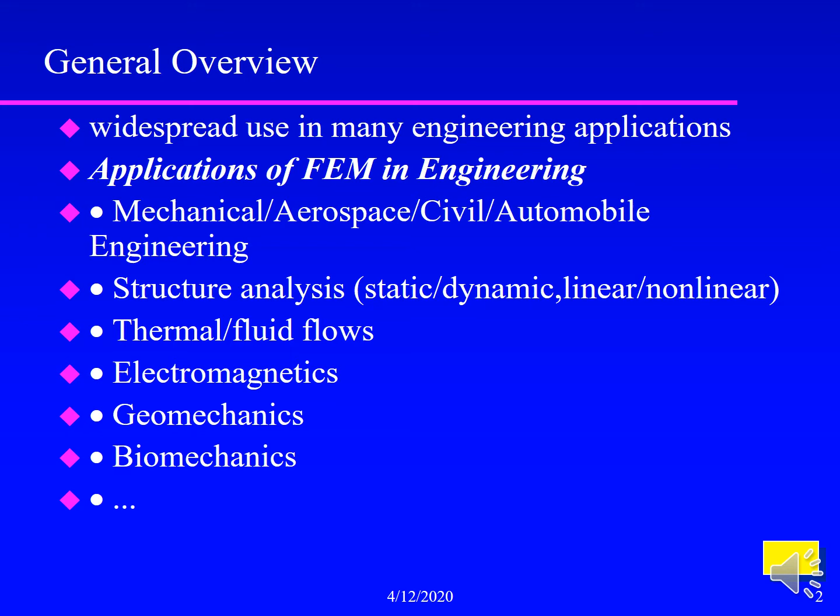Mechanical, aerospace, civil engineering, automobile engineering, anywhere it is applied. It is mainly used for structural analysis, static, dynamic, linear and nonlinear, thermal and fluid flows, electromagnetics, geomechanics, biomechanics. These are the examples which I discussed.

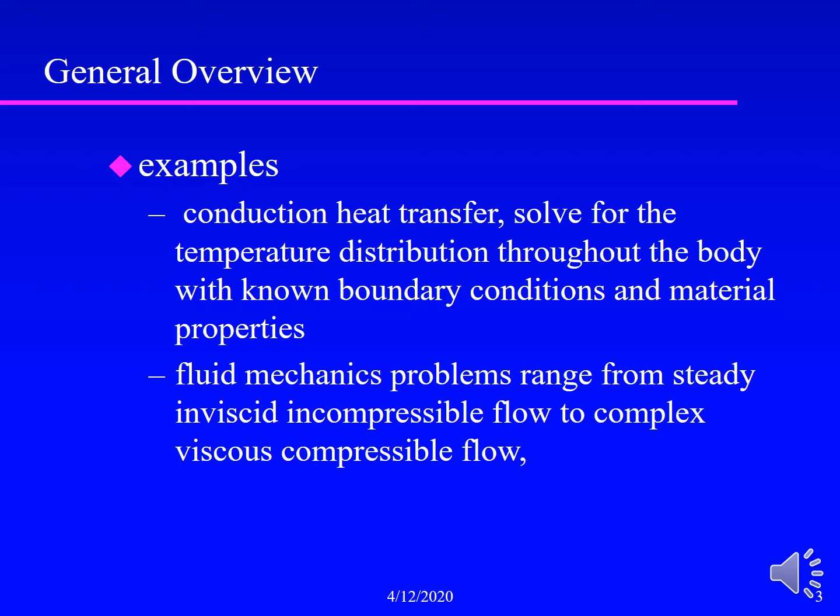A few examples are given: conduction heat transfer, the temperature distribution throughout the body with known boundary conditions and material properties. Fluid mechanics problems range from steady, incompressible flow to complex viscous compressible flow in various cases.

Acoustics uses finite element and boundary element numerical methods. Electromagnetic solutions for magnetic field strength give insight into the design of electromagnetic devices. Capabilities include fluid structure interactions, biomechanics, structural analysis, blood flow in blood vessels.

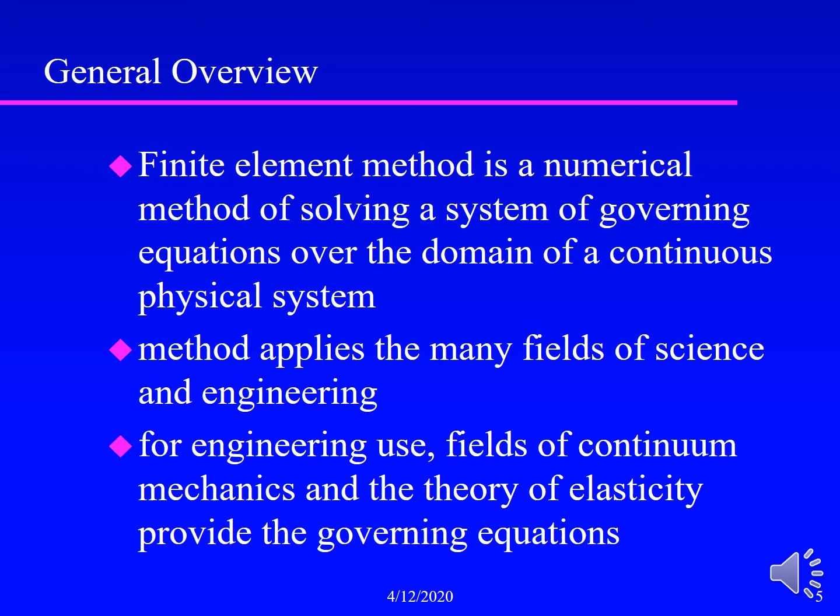The finite element method is a numerical method of solving a system of governing equations over the domain of a continuous physical system. The method applies in many fields of science and engineering. Continuum mechanics and the theory of elasticity provide the governing equations, which are solved by finite elements. A numerical method is used in order to make the solution easy.

Most engineering problems require the solution of governing differential equations. As in the case of a tapered bar, the displacement satisfies the equation du/dx plus P/(AE) equal to 0. This is the fixed end, where u(0) is equal to 0, and the unknown displacements at various points are found by the equations.

For the beam, the governing equation of deflection is d⁴w/dx⁴ plus p(x)/EI equal to 0. At x = 0, dw/dx is the slope, and both deflection and slope are 0 at the fixed end, and the unknown displacement w is solved by finite elements.

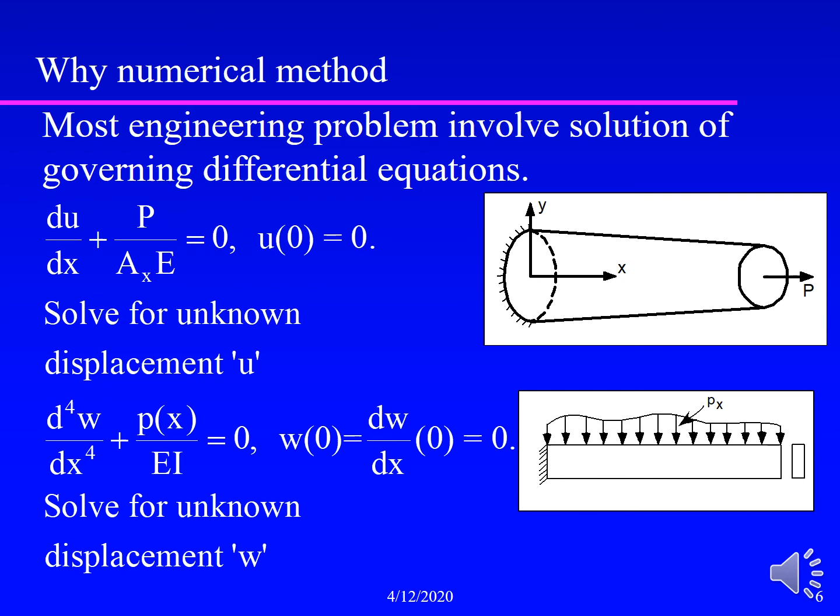Heat transfer, torsion of shafts, irrotational flow, seepage through porous media. These are the equations: ∂/∂x(kx ∂φ/∂x) plus ∂/∂y(ky ∂φ/∂y) plus ∂/∂z(kz ∂φ/∂z) plus Q equal to 0, where φ is the potential function. As boundary condition on a particular surface, known functions of φ are given, and the unknown function φ is to be solved inside the domain.

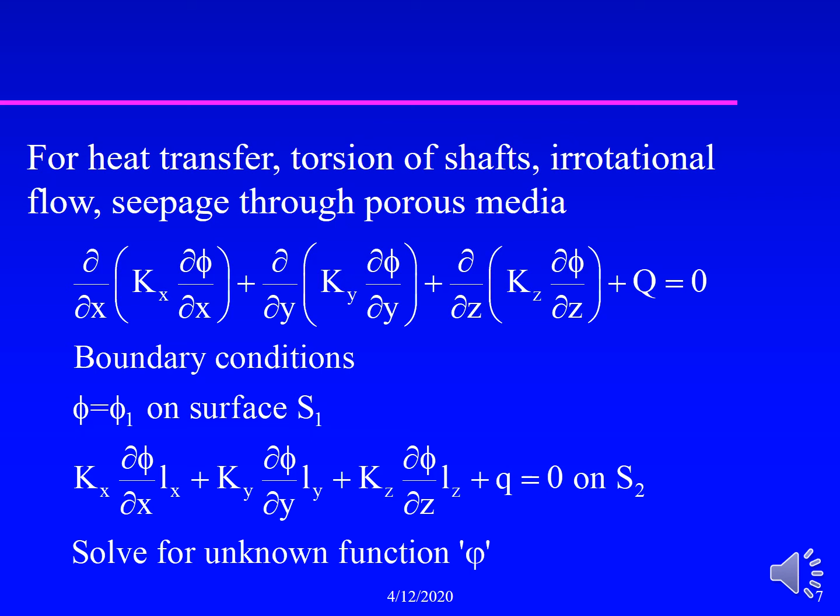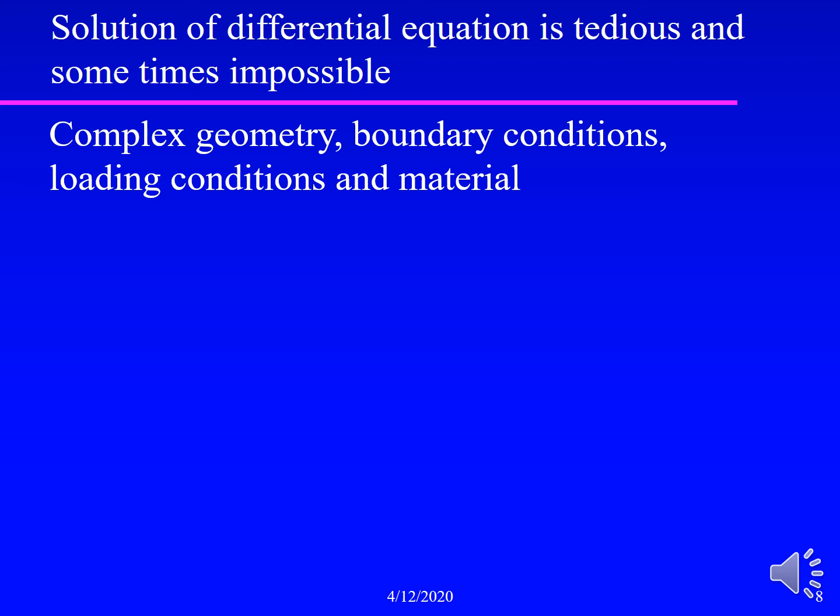The solution is tedious, sometimes impossible, therefore we go for finite elements, due to complex geometry, boundary conditions, loading conditions and material. When the geometry is complex, you cannot have the exact solution. Boundary conditions also vary. Loading conditions and materials differ at different positions, as you can observe in geomechanics and soil mechanics.

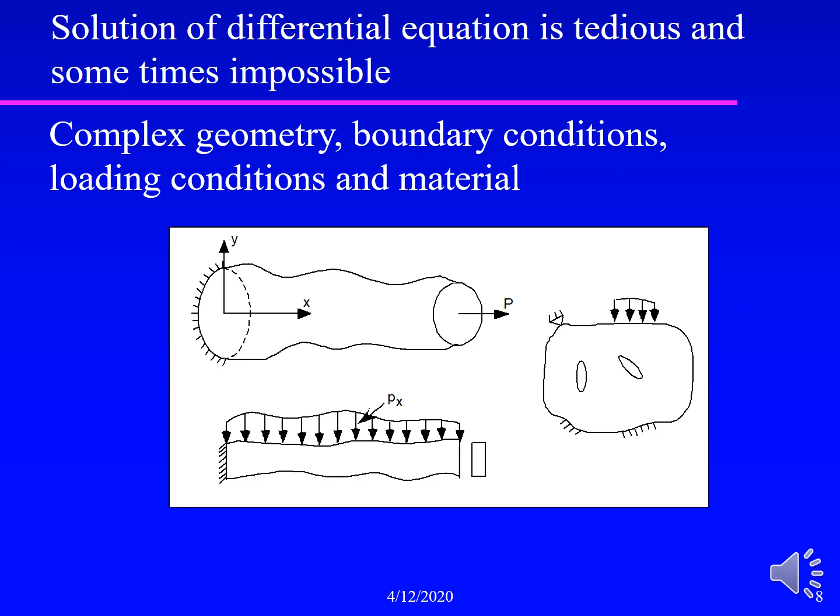And for this undulated beam also, where the loading is different at different points with no particular function, we can go for the finite element method. In the solution, the domain is divided into these elements, and this process is carried out.